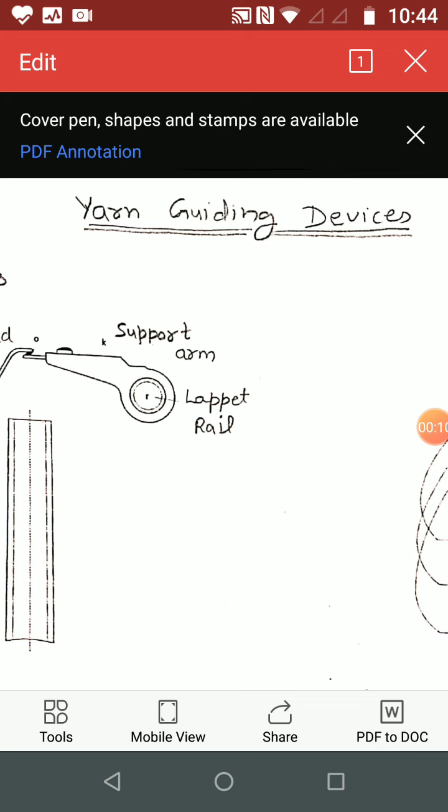Dear students, the topic of my today's lecture is yarn guiding devices on ring frame. The devices we use for guiding the yarn from front roller nip to the winding on the bobbin. Mainly three devices we use. First one is lappet, then balloon control ring and separators.

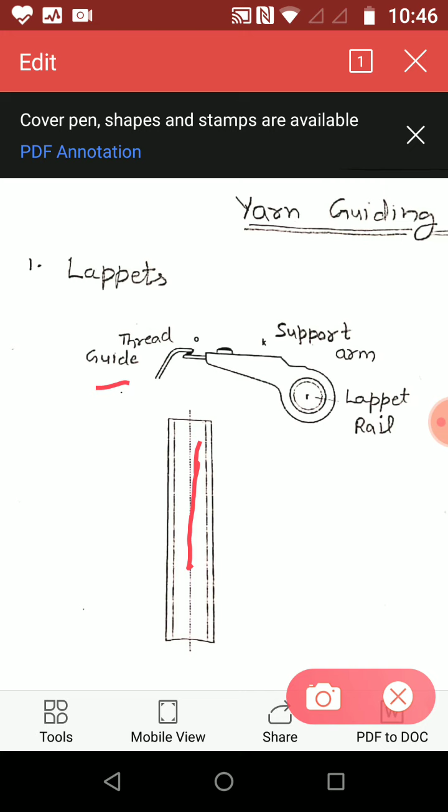This one is a diagram of lappets fitted immediately over the spindle. The thread guide has to guide the yarn centrally over the center of the axis of the spindle. The thread guide consists of wire eyelet and thread board or support arm. The thread guide eyelet is mounted adjustably in the thread board to enable it to be centered. The latter is itself fitted on the continuous thread guide rail or lappet rail.

The rail can be raised and lowered together with the thread guides while building takes place or winding takes place. It performs the same movement as the ring rail but with smaller traverse height. That is a continuous raising and lowering during layering and continuous lift by small amounts as switching traverse.

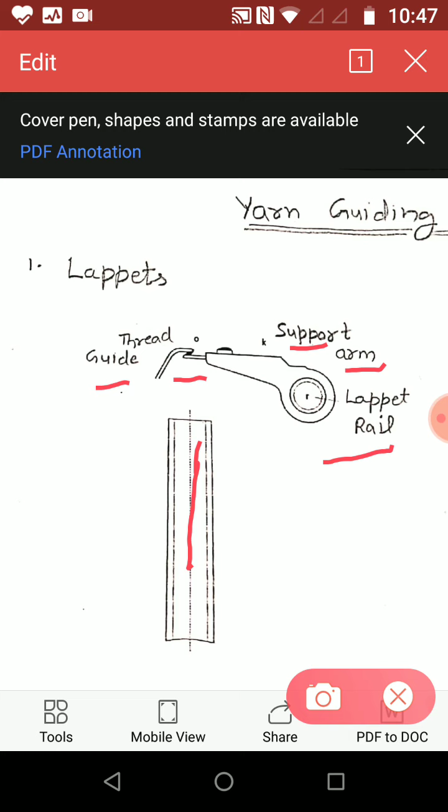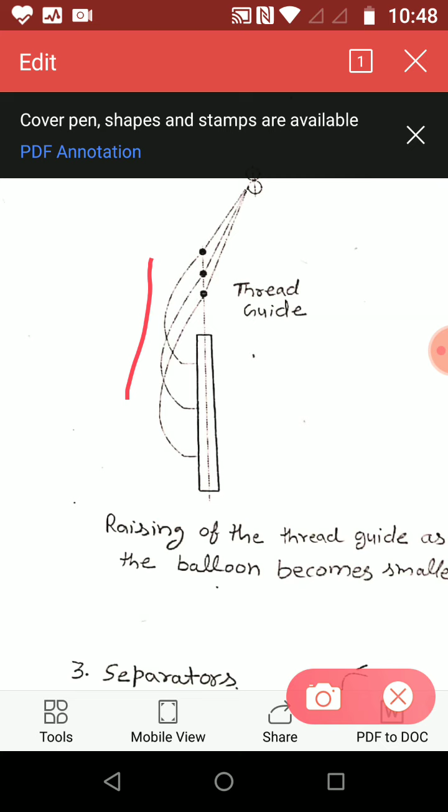As shown in this diagram, this movement of thread guide ensures that difference in balloon height caused by changes in ring rail position do not become too large. Otherwise, the excessive tension variation in the yarn would produce correspondingly negative effects on yarn breakage rate and yarn characteristics.

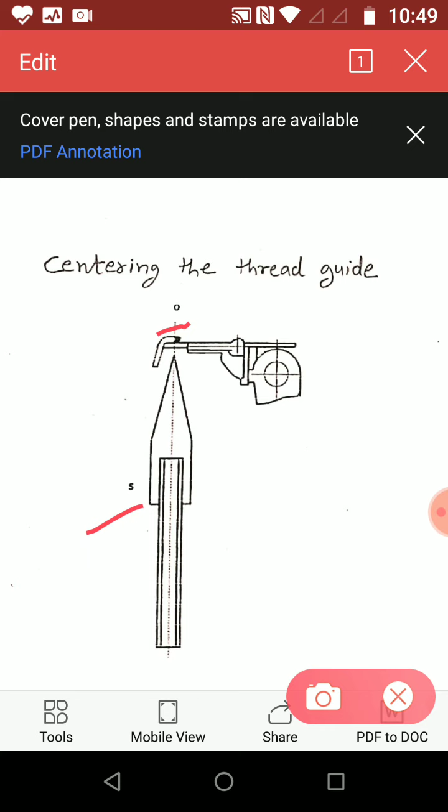This one is a diagram of centering the thread guide. Thread guides must be centered from time to time using a setting device which is mounted temporarily on the spindle. In this diagram, S is that centering device. Since the yarn path does not run through the middle of the guide but on its inner edge, the point of setting device must be directed towards the inner edge of the guide.

The large balloon dimensions lead to relatively high air drag on the yarn in the balloon. This in turn causes increased deformation of the balloon curve out of the plane intersecting the spindle axis. This deformation can lead to balloon instability. There is increased danger of balloon collapse.

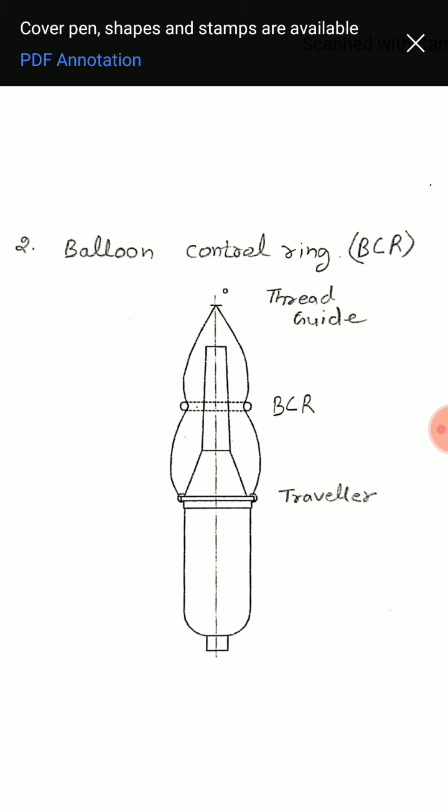In order to avoid these consequences, balloon control rings are used, each dividing its balloon into two smaller sub-balloons. In spite of its large overall height, the double balloon created in this way is thoroughly stable even at relatively low yarn tension. As in the case of lappets, the balloon control ring also participates in the lift movements of the ring rail but with shorter stroke length.

Next yarn guiding device is separators. As we know, most ends down arise in the spinning triangle. If a break occurs in the triangle, then the newly created free yarn end must be drawn onto the bobbin and wound onto it. During this process, the broken end thread lashes around the spindle.

In the absence of protecting devices, that is separators, this broken end would be hurled into the neighboring yarn balloon and would cause an end down on that spindle also. This procedure would be repeated continuously. The ends down would travel along the row of the spindles.

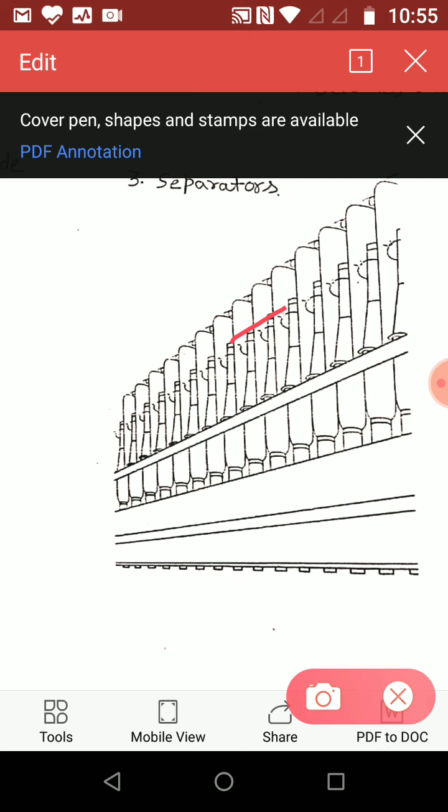In order to prevent this happening, separator plates of aluminium or plastic material are arranged between the individual spindles. In this diagram, these are those plastic or aluminium spindle plates or separators. These are all about yarn guiding devices on ring frame.